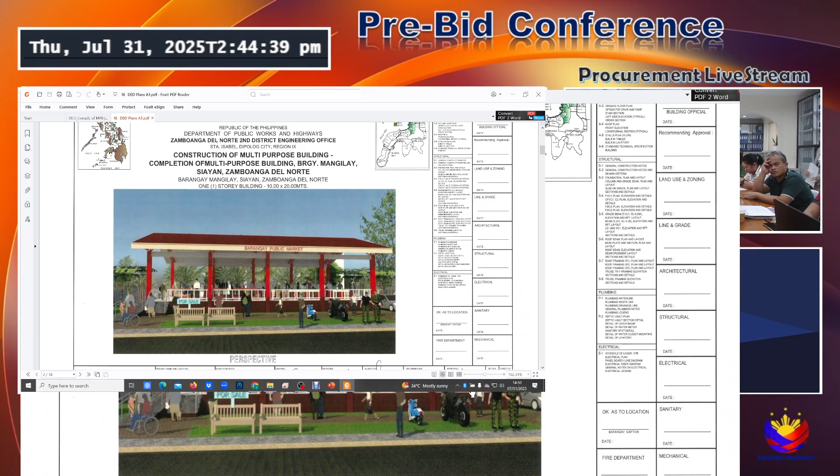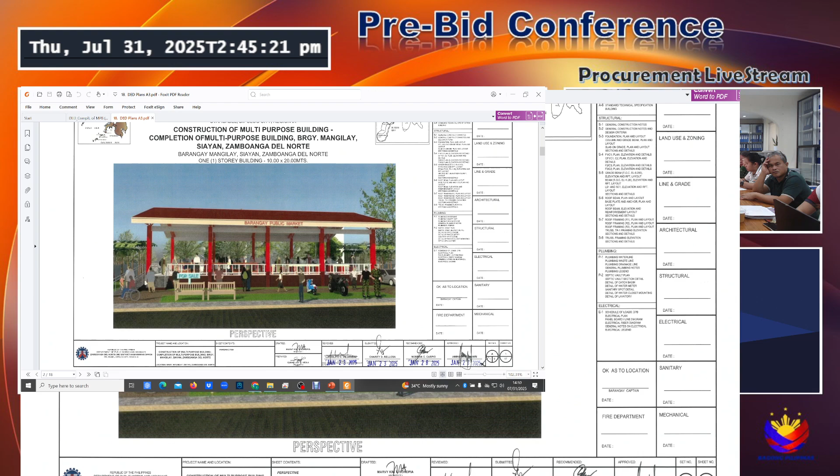So for contract ID number 25JC0074, construction of multi-purpose building, completion of multi-purpose building, Barangay Mangilay, Siayan, Zamboanga del Norte. This is the plan for this project. This is a one-story, 10 by 20 barangay public market, and its scope of work is processing of building permit and occupancy, earthworks, reinforced concrete works, civil works, masonry works for zocalo, roofing and accessories, painting works for steels and columns, cement plaster finish for columns, gravel fill on slab, concrete tables, and built-in lavatories with cement plaster finish and trench drain without steel gratings. So that's all for contract ID 25JC0074.

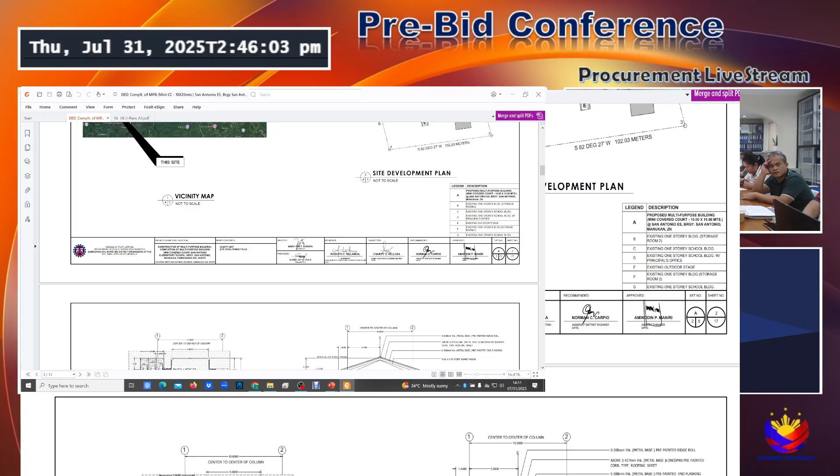Now let's proceed with the next project. The next project is contract ID number 25JC0084, construction of multi-purpose building, completion of multi-purpose building mini covered court, San Antonio Elementary School, Barangay San Antonio, Manukan, Zamboanga del Norte. So this project is a 10 by 15 mini covered court, 3 bays. Its scope of work is processing of building permit and occupancy, earthworks, reinforced concrete works, civil works, masonry works for zocalo, roofing and accessories, painting works for steels and columns, cement plaster finish for columns, and gravel fill on slab. So that's all for 25JC0084. Okay, thank you, Architect Winnie, for discussing the basic contract data, especially the discussion of the detailed design plan.

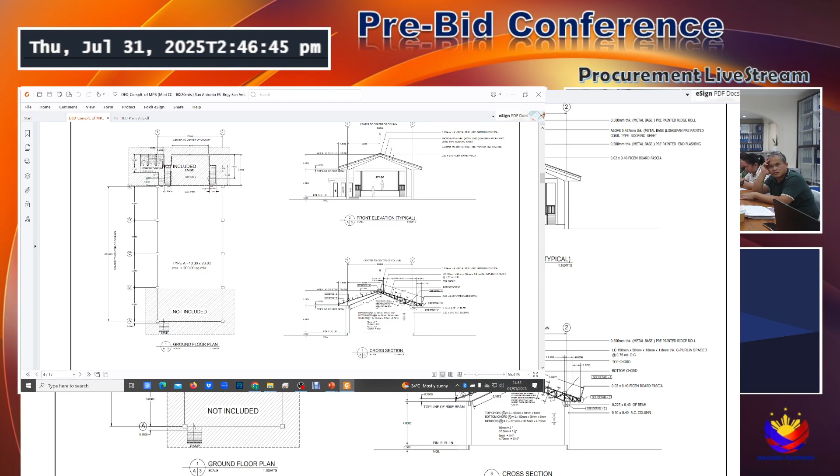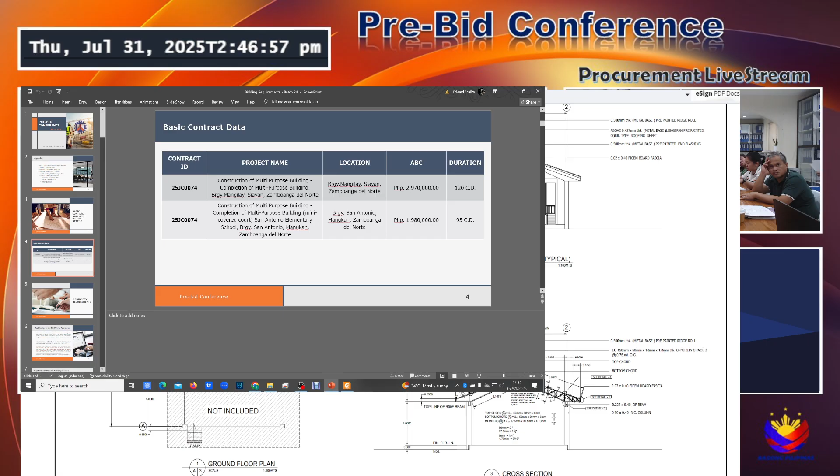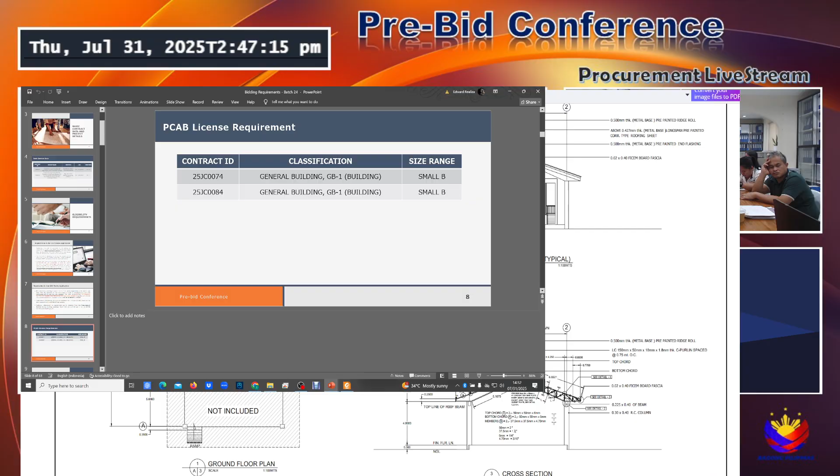Now let's proceed with the documents comprising the technical and financial proposals of the bidders. So first, let's discuss the eligibility requirements. These are the documents to be submitted by the bidder. Make sure that the bidder has the following PCAB license requirement. For both contract IDs 74 and 84, this classification must be General Building GB1, and the size range must be Small B. Now, for the technical component of bids,

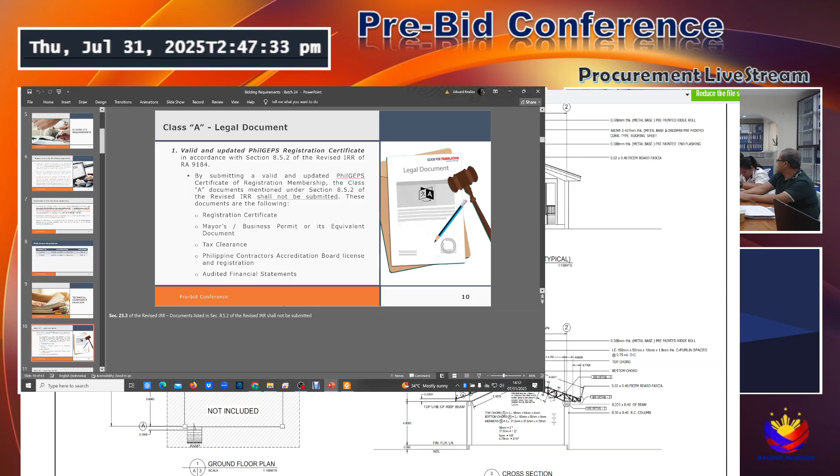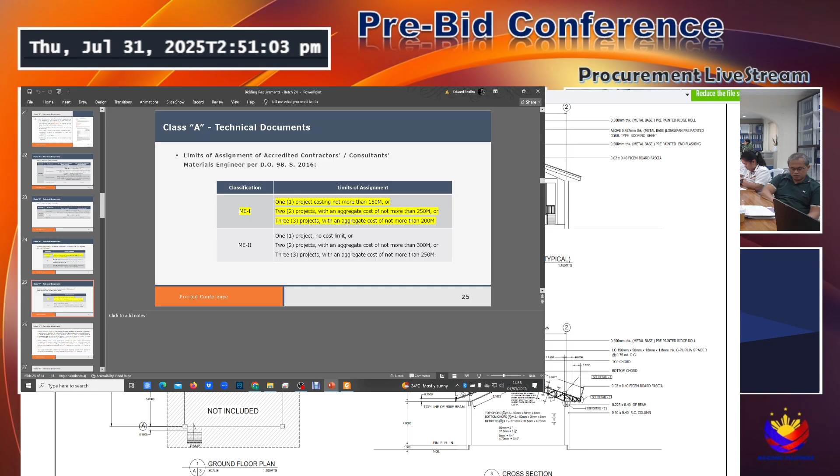And then this is for the materials engineer, the limits of assignment. Another document to be submitted by the bidder is their list of contractors' major construction and materials testing equipment. The bidder must use the prescribed form number 15 together with the following documents, whether it is owned, leased, or under another purchase agreement.

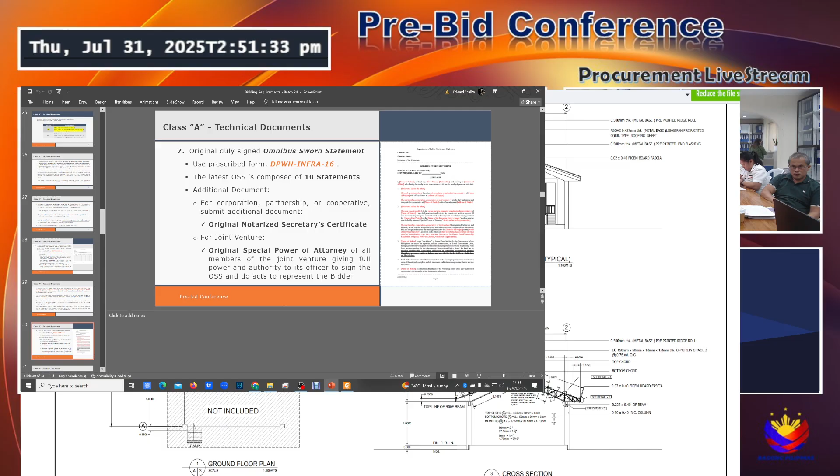Then we have another document under Class A technical documents, which is the Omnibus Sworn Statement using form number 16. The latest OSS is now composed of 10 statements.

Another document to be submitted by the bidder under Class A financial documents is their net financial contracting capacity. For NFCC, the following formula must be followed.

NFCC is equal to current assets minus current liabilities, times 15, minus the value of all outstanding and uncompleted portions of projects under ongoing contracts, including awarded contracts yet to be started coinciding with the contract to be bid. The value of the current assets and current liabilities must be equal to those values as reflected in the financial statements.

For Class B, we have the joint venture agreement or a duly notarized statement from all potential joint venture partners stating that they will enter into and abide by the provisions of the joint venture agreement the instant the bid is successful. This is if the joint venture is not yet in existence.

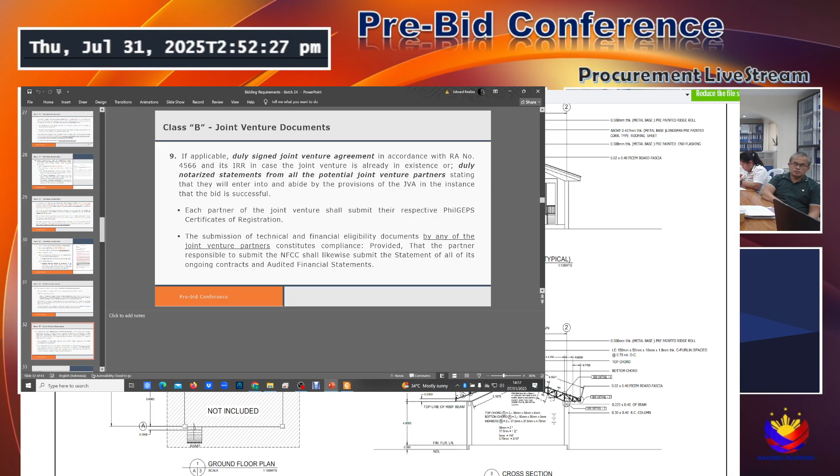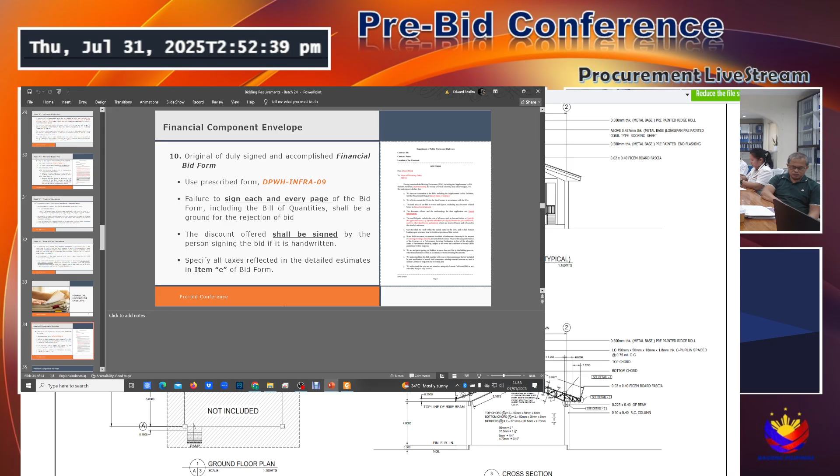Now, for the financial component envelope, we have here the different documents to be submitted by the bidder. The first one is the financial bid form using form number 9. Make sure that each and every page of the bid form is signed by the person signing the bid, including the discount if it is handwritten.

Another document is the bill of quantities. Take note that the bill of quantities is composed of two portions: the first is the BOQ itself using form number 17, and the second is the bid price summary using form number 18. Make sure each and every page of these documents is signed by the person signing the bid. Failure to do so is a ground for the rejection of your bid.

The third document is a detailed estimate. There is no prescribed form, but make sure you include a summary sheet indicating the unit prices of construction materials, labor rates, and equipment rentals used in coming up with the bid. Also, in the calculation of your detailed estimate, include the cost of all taxes.

And the last one is the cash flow by quarter using form number 19. Make sure that your cash flow is consistent with the duration of the procurement project. So those are the documents comprising the technical and financial component envelope, Mr. Chair.

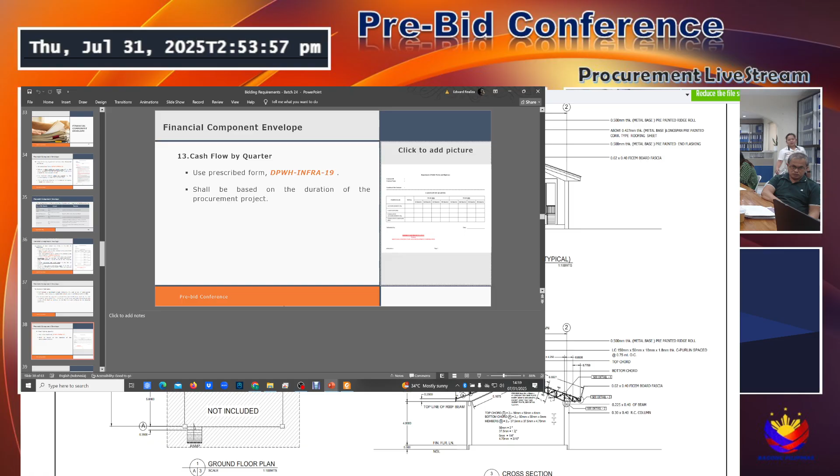Thank you. We have done.